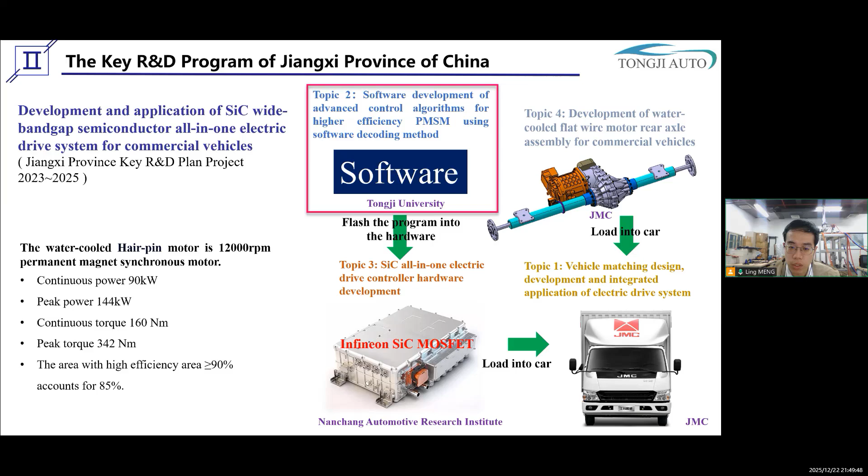The first research topic I encountered during my PhD study was the key R&D program of Jiangxi Province of China, which is to develop and apply silicon carbide wide bandgap semiconductor all-in-one electric drive systems for commercial vehicles. The water-cooled hairpin motor is a 12,000 RPM permanent magnet synchronous motor with peak power up to 144 kilowatts and peak torque up to 342 Newton meters. Among the tasks assigned to Tongji University was the development of the software for the motor controller.

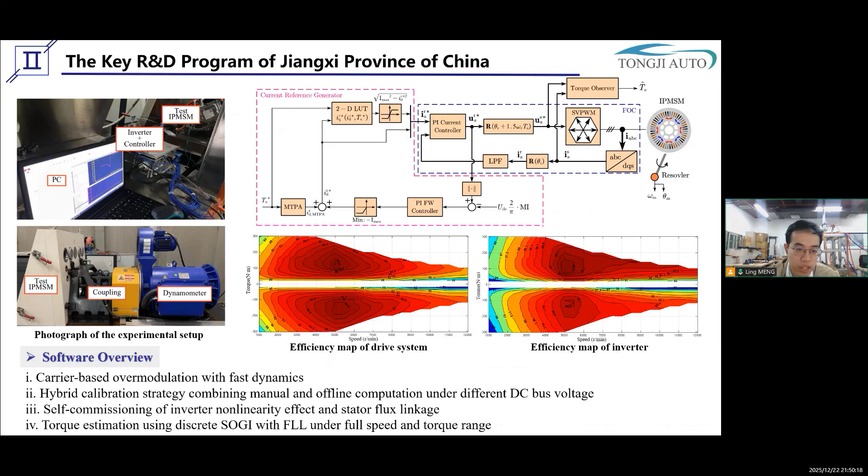This slide shows the experimental setup and the overall control systems of this project. We also completed efficiency tests on the system and on the inverter. As the student leader of the project, I was responsible for developing carrier-based overmodulation, hybrid calibration strategies, self-commissioning method, and torque estimation method. In particular, I would like to introduce the high-precision torque estimation algorithm that is suitable for low carrier ratios.

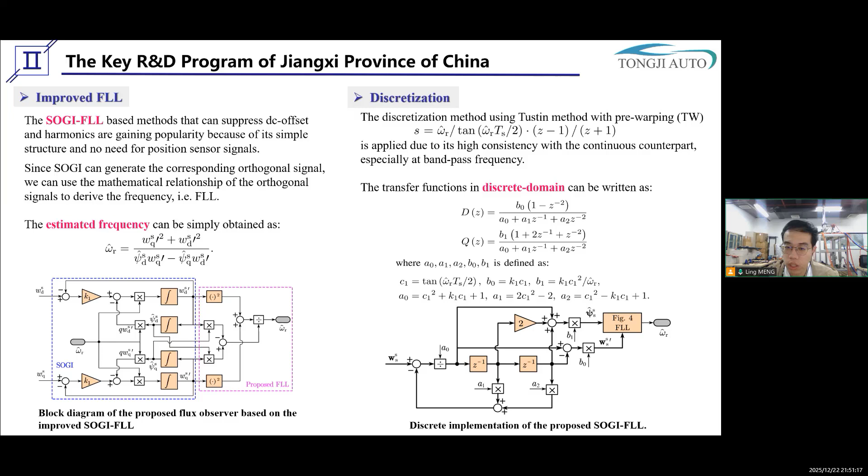The second-order generalized integrator frequency locked loop can suppress DC offset and harmonics, and there is no need for position sensor signals. Since SOGI can generate the corresponding orthogonal signals, we can use the mathematical relationship of orthogonal signals to derive the frequency, which is quite different from the traditional one. And the estimated frequency can be simply obtained as the following equation. The discretizing method uses Tustin method with pre-warping. Note that the denominators of the DZ and QZ are identical, therefore they can share the same structure with only different coefficients of the numerators.

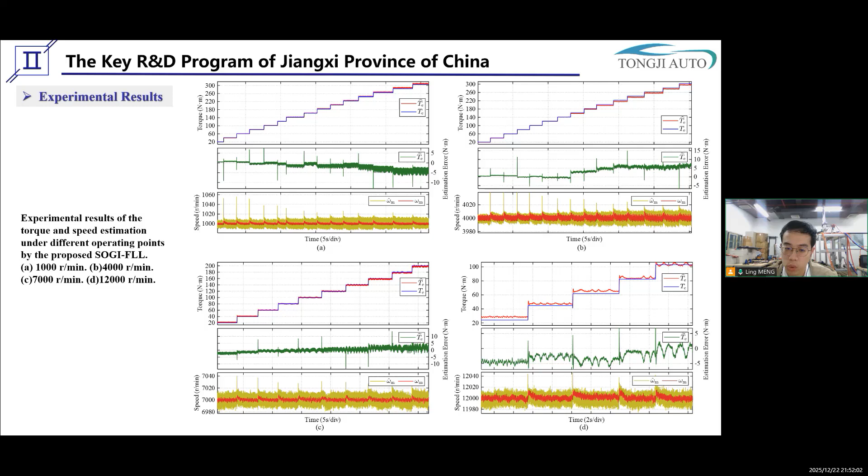This slide shows the experimental results. The sudden disturbance in estimation error during torque step change is caused by the sampling delay and the filtering in torque transients. The maximum torque estimation error is 6.4 Newton meters, occurring at 4,000 RPM, which may be caused by a mismatch of the resistance parameters due to temperature rise. With the speed increasing, as shown in C and D, the torque estimation error decreases. In addition to torque estimation, the new FLL proposed in this paper can track the motor speed with a satisfactory accuracy.

The main focus of my PhD research is on high-speed air compressor systems for fuel cells with maximum speed up to 90 and 120 kilorevolutions per minute. To reduce the PWM current ripple and alleviate EMI problems caused by high switching frequency of wide bandgap semiconductors, one promising solution is to install the LC filter between a conventional voltage source inverter and the motor. However, as the order of the control system increases, more sophisticated current and sensorless control strategies are required.

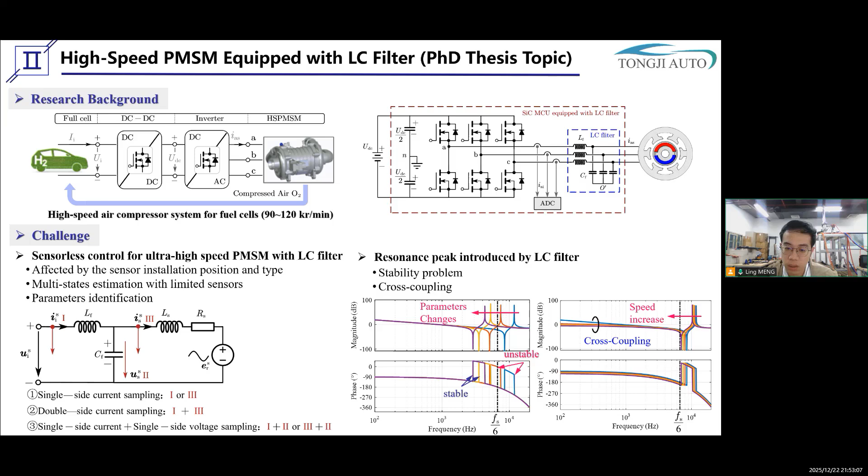On one hand, to minimize the need for additional sensors and to achieve more accurate position estimation, additional states must be estimated. On the other hand, the LC filter introduces resonance problems, which require additional active damping algorithms to suppress. Otherwise, stability issues may arise. We developed the overall control systems shown here with dedicated active damping current controller and adaptive observers. In order to achieve high accuracy control and observation, the system needs to be discretized with the zero-order-hold equivalent model.

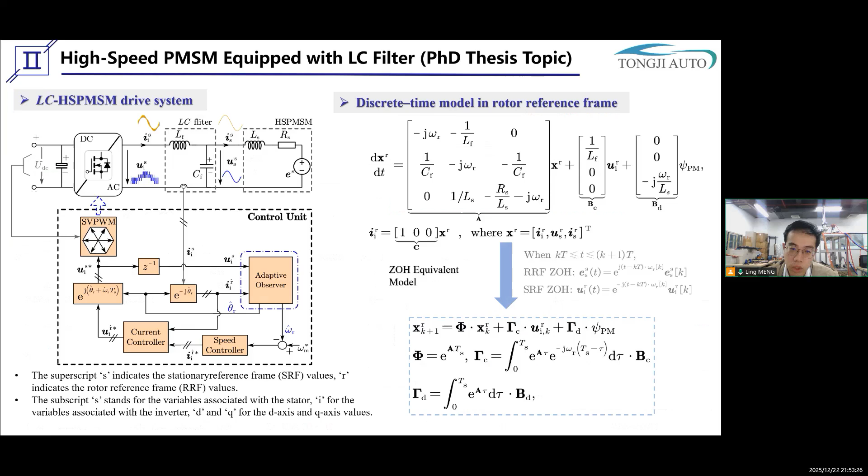First, we proposed a filter-based active damping current controller, which consists of the dynamic decoupling controller and active damping filters. The active damping filter method primarily achieves resonance suppression by adjusting the phase frequency characteristics of the open loop transfer function. Since the open loop transfer functions are cascaded, the phases of the system are simply added. According to the definition of the Nyquist stability criterion, in order to stabilize these control systems, the phase frequency of the system at the positive resonant frequency must avoid traversing negative pi plus 2k pi. The solution to these inequalities represents the phase range that the filter should provide at different resonant frequencies.

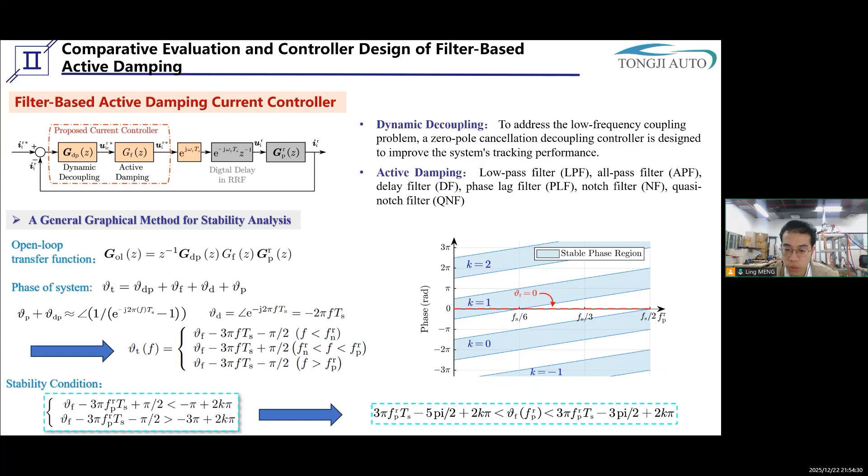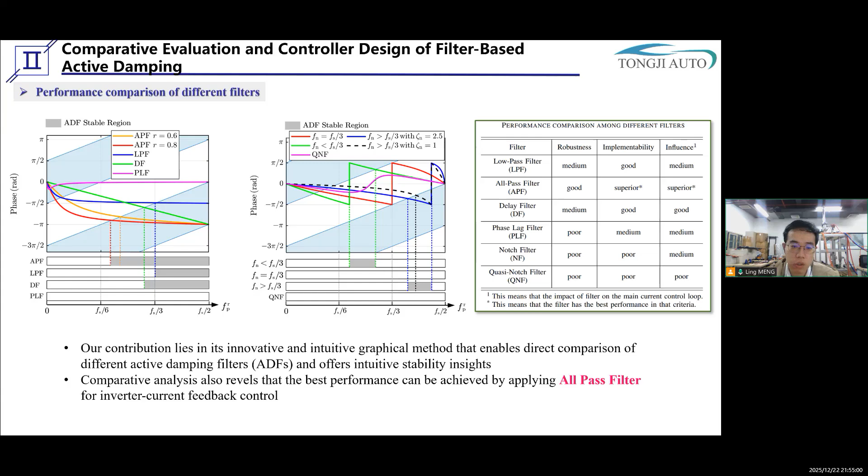The boundaries of the inequalities are plotted, and the stable phase regions are denoted by the blue shadowed area. Using the proposed general graphical method, we can directly compare different active damping filters and filters with parameter variation. The method allows direct visualization of how parameter changes affect the stable region. Comparative analysis also reveals that the best performance can be achieved by applying an all-pass filter for inverter current feedback control.

The proposed current controller is designed using an all-pass filter combined with the dynamic decoupling controller, where the R of the all-pass filter and the gain K of the decoupling controller are co-designed to satisfy the system's phase margin and gain margin requirements in both low frequency region and high frequency region. When PM1 equals PM2 equals 1/3 pi, the angle can be calculated at different cutoff frequencies as a boundary of the stable region. The intersection of the high and the low frequency stability boundaries defines the maximum achievable K and corresponding R at a given speed, satisfying the system stability margin requirements while ensuring adequate dynamic performance.

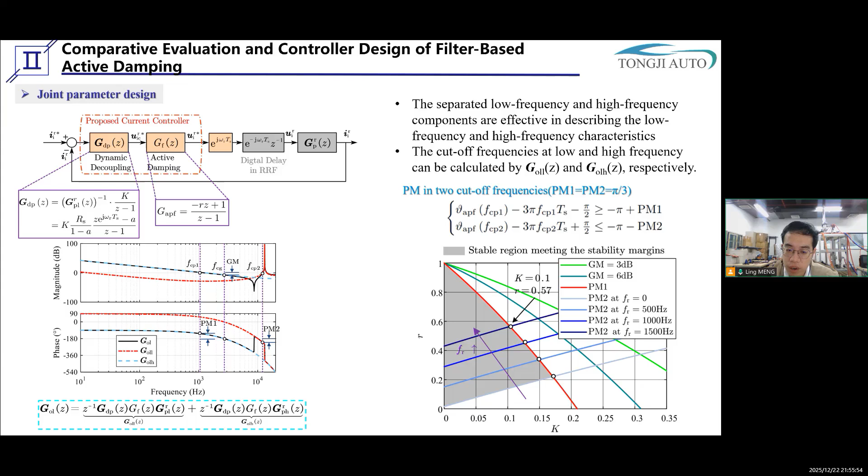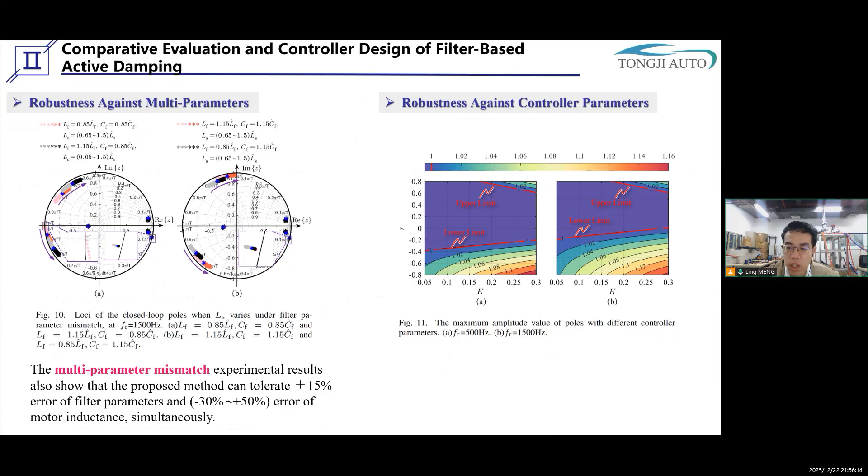We also conducted the robustness analysis against single parameters, multi-parameters, and controller parameters. The parameter selection method proposed in the paper incorporates 4 frequency domain stability indices, ensuring parameter robustness across a wide range.

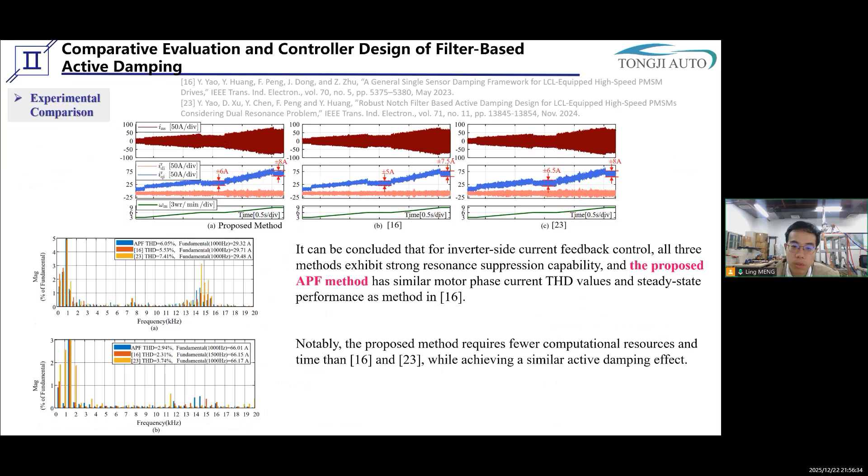We also conducted the comparison experiment with the state-of-the-art method. The proposed APF method has similar motor phase current THD values and steady-state performance. Notably, the proposed method requires few computational resources and time. And the parameter robustness is also verified, which is identical to the analysis.

So far, the designed current controller has been 2 degrees of freedom, only considering the resonance suppression and decoupling control, while disturbance rejection performance has not been taken into account. Therefore, we propose a 3 degrees of freedom current controller that also achieves disturbance rejection without extra sensors and observers.

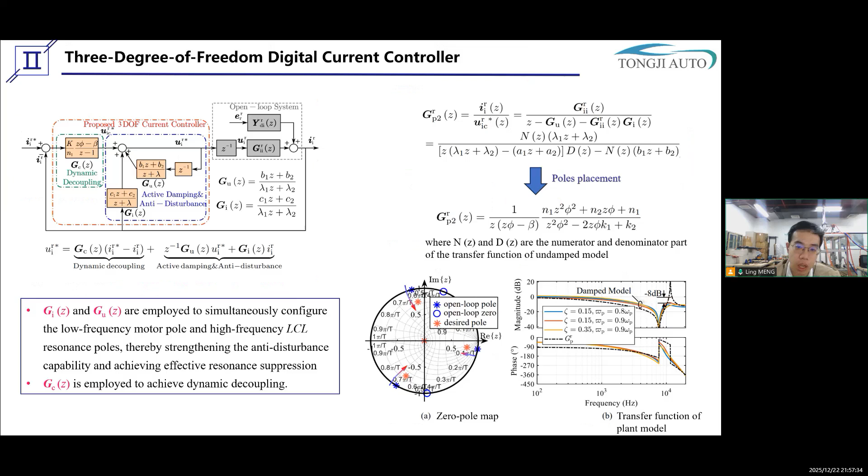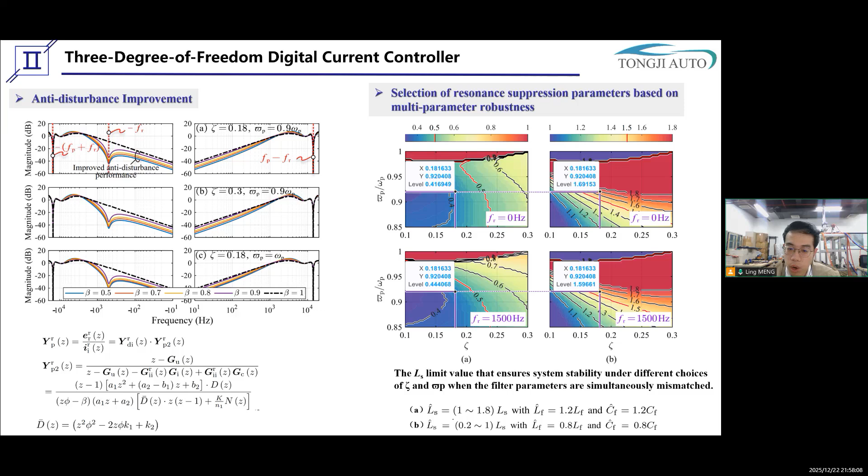To enhance parameter robustness, two additional controller parameters are designed to accommodate parameter variation. By selecting appropriate parameters, the robustness can be greatly enhanced. The robustness analysis is also executed for single parameters and multi-parameters. As can be seen, the proposed method can tolerate a much larger parameter mismatch than the filter-based active damping method.

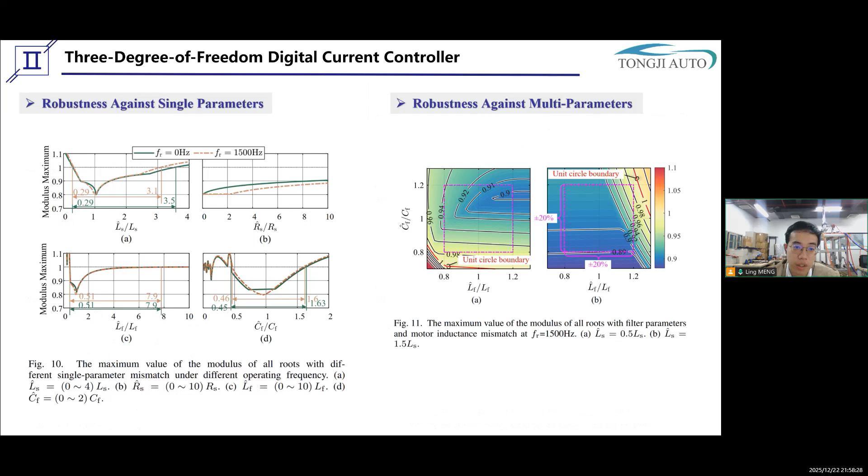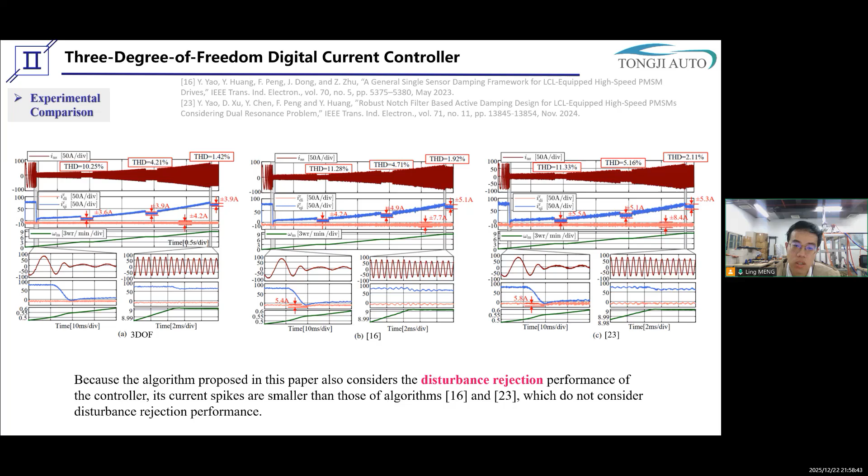Because the algorithm proposed in this paper also considers the disturbance rejection performance of the controller, its current spikes are smaller than those of algorithms which do not consider disturbance rejection performance. Although the 3-degree of freedom controller has the most complex structure, it offers the best steady state and dynamic performance with proper parameter design. It can achieve extremely high parameter robustness.

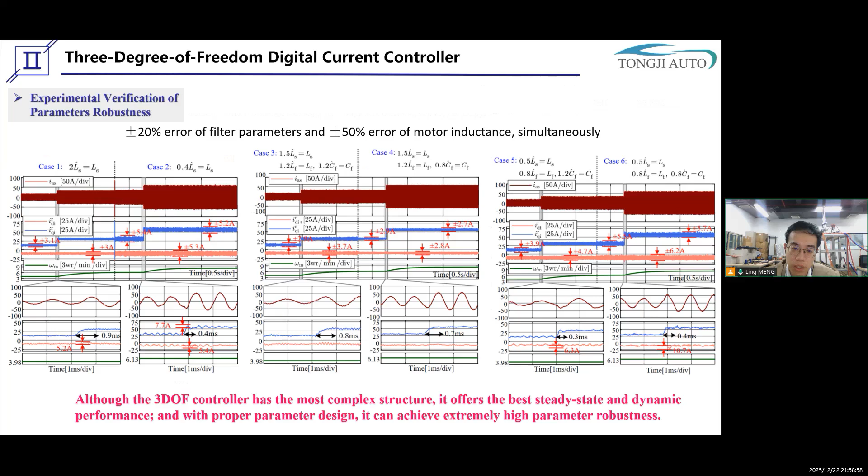With respect to sensorless control, we propose a discrete time adaptive full-order observer composed of a full-order state observer and two adaptive laws. The full-order state observer is designed in discrete time using direct pole placement. Furthermore, if we linearize the observer's estimation on the operating point, we can see that there are PM flux error components and angle error components in the current error component, and the two are orthogonal. This allows us to independently design adaptive laws for the identification of each parameter.

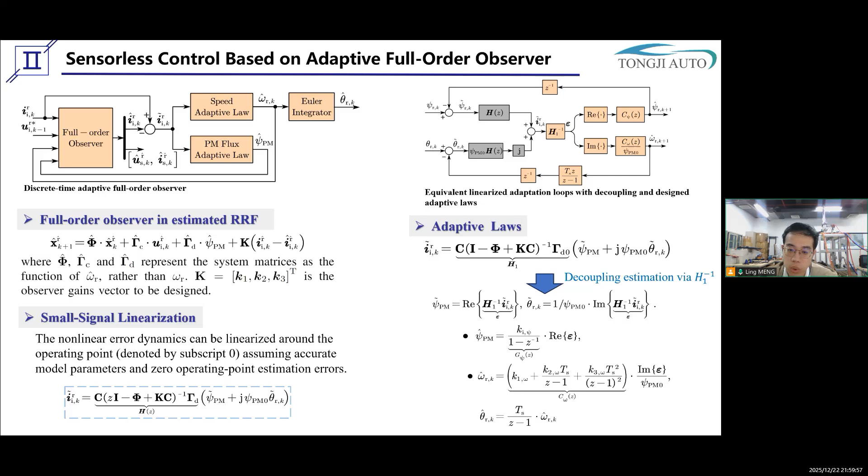This paper employs a simple integrator for smooth PM flux estimation and a type 3 phase-locked loop for speed estimation. It's also necessary to combine the full-order observer with adaptive laws to perform stability analysis of the entire adaptive observer. The results reveal a wide feasible range for observer parameters, validating the robustness of the design.

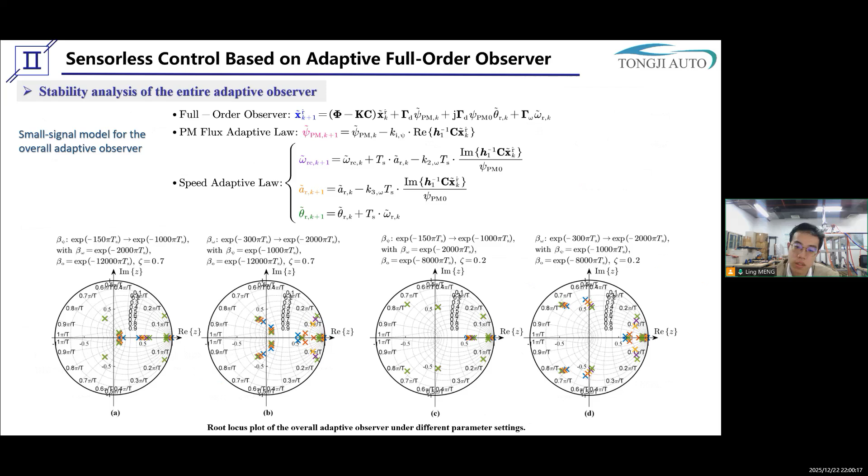Finally, the effectiveness of the sensorless algorithm is verified on a 30 kilowatt high-speed motor bench with a maximum speed of 90 kilo revolutions per minute. At low speed, the IF starting method is employed to force the motor to the lowest speed, 5,000 RPM, at which the sensorless observer can operate reliably.

Not only is the position estimation error during acceleration around 0 degrees, but the estimated PM flux closely matches the nominal value of 0.026, validating the effectiveness of the adaptive laws.

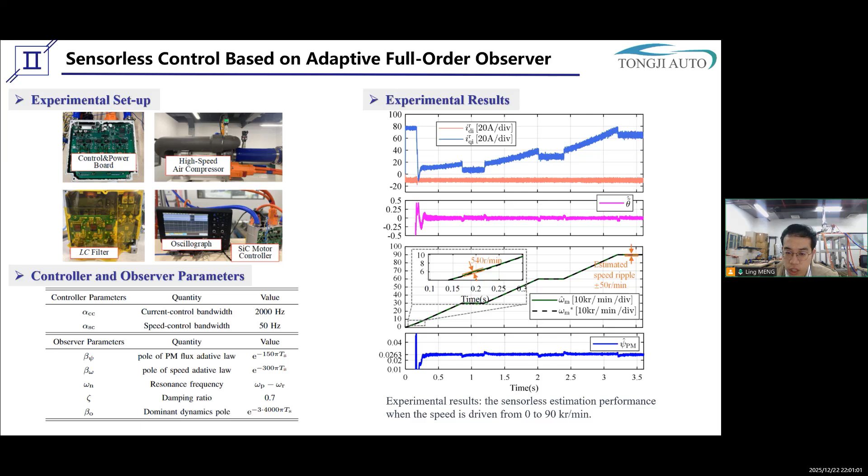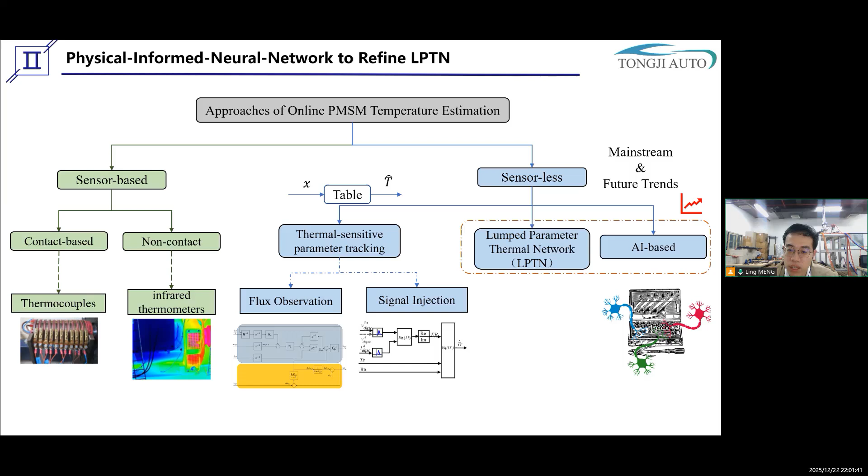The following section covers motor condition monitoring based on data-driven algorithms, focusing on two aspects: motor temperature estimation and sensorless control. Let me first introduce the data-driven temperature estimation algorithm. As shown in this slide, on the left side are the sensor-based methods. All these methods require extra sensors, increasing the system cost. However, sensorless methods can be further divided into thermal sensitive parameter tracking, LPTN, and data-driven. The last two are non-invasive methods and are currently the mainstream and the future trend.

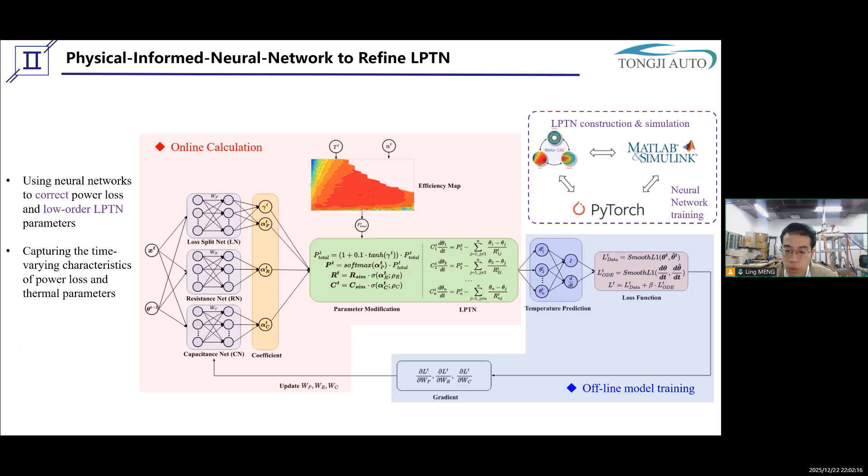Unlike traditional LPTN, where the low order lacks accuracy and the high order requires numerous parameters and necessitates FEA support, we introduce a lightweight neural network to directly correct losses, thermal resistance, and capacitances, thus characterizing the time-varying property of losses and thermal parameters. Neural networks can offer higher fitting accuracy, do not require complex prior knowledge, and are more general.

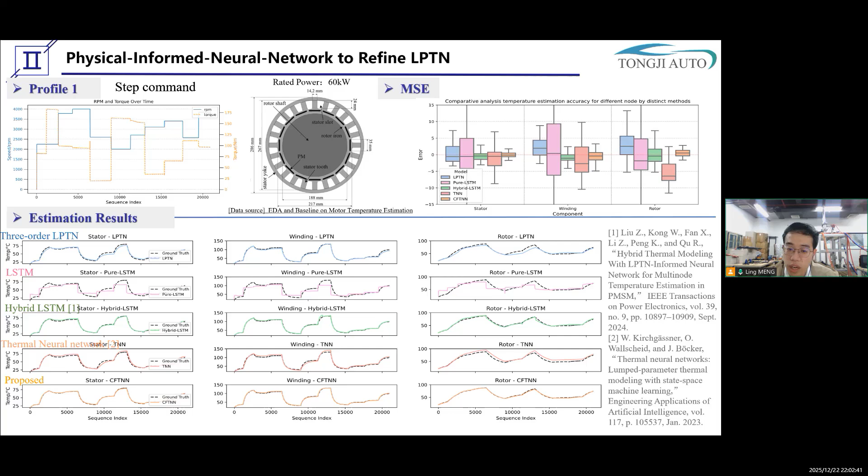We conducted relevant validations on a dataset of 60 kilowatt water-cooled motors. We also compared with conventional LPTN algorithms, neural networks, and the state-of-the-art algorithm. The proposed method has the smallest estimation error and can track the real temperature well. And this is another profile.

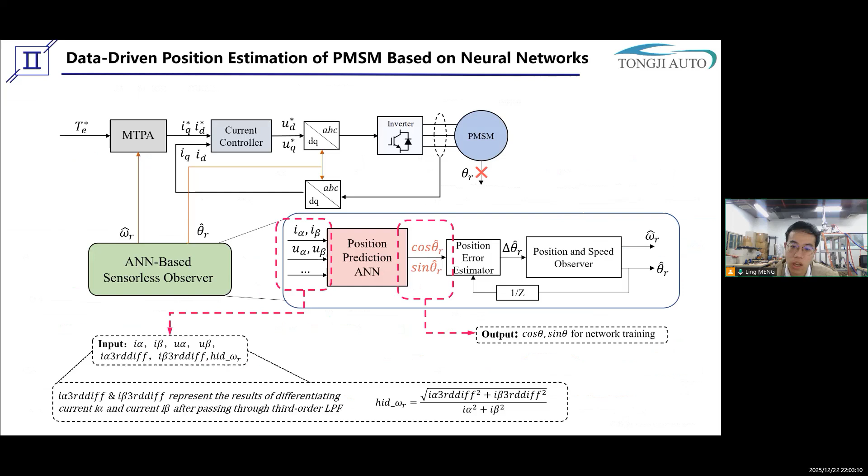The next is the sensorless control. Currently, conventional model-based methods at low speed mostly use nonlinear observers, which are complex to tune and difficult to analyze. However, a neural network learns the mapping from the current and voltage signals to position information. It can directly train on relevant data and be reliably developed. This is the detail of the network construction. It combines the CNN and the LSTM.

We also conducted a related test on a 47 kilowatt automotive motor. The proposed algorithm can achieve full load operation at 3.3% of rated speed, and the electric angle error is within plus or minus 4 degrees throughout the entire test condition.

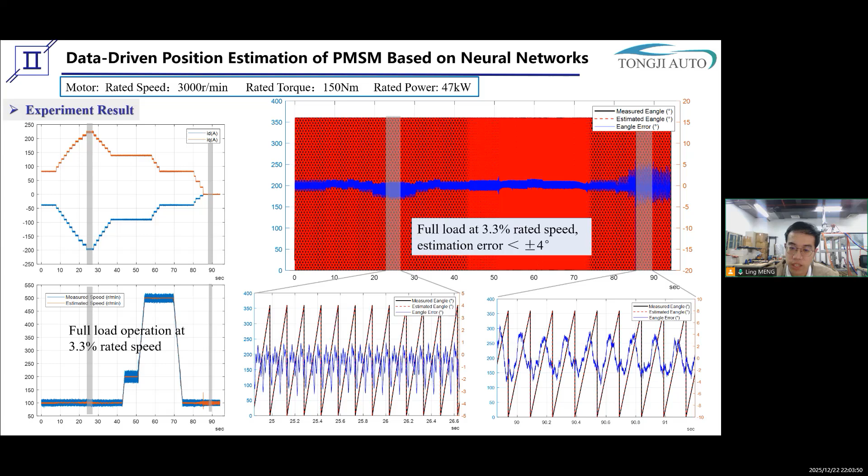During my PhD studies, I published 6 papers, including 4 journal papers, 2 of which were in top-tier journals, IEEE TTE and IEEE TPEL, as well as 2 conference papers. Additionally, I hold 2 granted Chinese invention patents focusing on the complex vector compensator and motor speed controller.